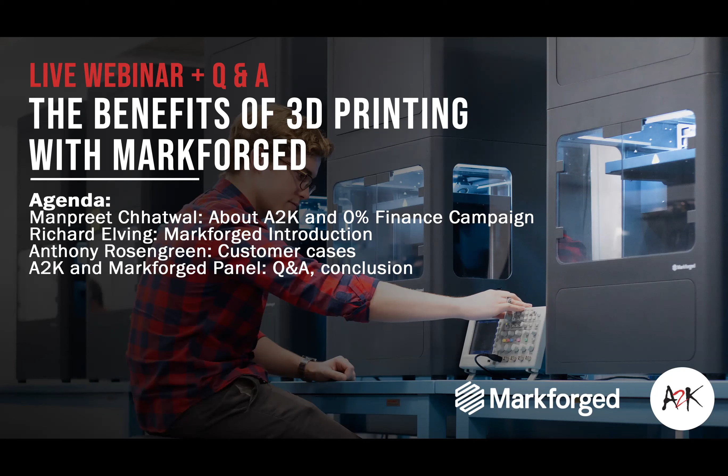So to start with, a little bit about A2K Technologies. A2K has been a technology partner for digitization of the AEC and MFG industry for about 30 years now. We help our clients reach their full potential by delivering complete technology solutions and support services such as education, consulting, project management. As part of RIB Software, a German stock-listed construction management ERP provider, now 70% owned by Schneider Electric, we have a global presence, but our focus and excellent footprint in the ANZ market is testament to our Aussie origins. We partner with numerous industry leaders, providing all sorts of technologies to our clients, and among them, standing tall is Markforged.

Okay, thanks for that introduction. My name is Anthony Rosengreen, and I'm the Markforged Applications Engineer for Australia, New Zealand, and India. I work for Markforged based in Melbourne with my local APAC Applications Engineering team. As part of my job, I have the chance to visit some of the most innovative customers in Asia Pacific, to get to know them and understand their journey towards Industry 4.0. So what I'm going to be doing today is introducing you to the company of Markforged, the industries we play in, our products, and share a few customer stories specific to each of our machine categories.

So first, a little bit about Markforged. We were established in 2013 in Boston, which is quite old for the additive manufacturing industry, and were founded by a team that came from MIT, a team of engineers. We're industry leaders in enterprise adoption and enablement, primarily enablement of manufacturers. In 2018 and 2019, we were earmarked as the second fastest growing hardware company by Deloitte, and in 2018, Forbes spruiked us as the next billion-dollar startup.

We have a few strategic investors, including Microsoft, Siemens, Porsche, and Summit Partners, among others. We've raised 140 million after an 82 million Series D round in 2019. So I am personally proud to be working for a company that has the world's largest fleet of online industrial 3D printers.

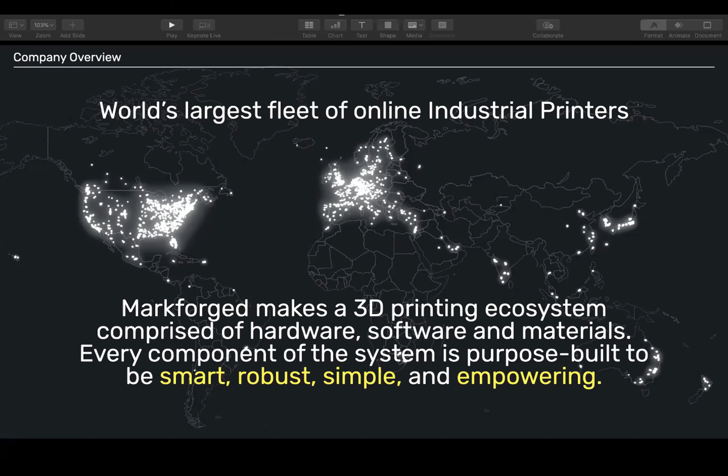So why 3D printing and why high-strength additive manufacturing? Well, firstly, to enable your business to move into Industry 4.0 and secure a competitive edge. As we all know, supply chain resiliency is an issue right now, and this technology helps enable manufacturers in this environment. The second point is to increase revenue and profits. With additive manufacturing comes a lot of simplicity in terms of labor costs, so you're able to minimize downtime, lower costs, and reduce inventory or overhead. We often talk about a digital inventory rather than a physical inventory, which is one way costs can be saved.

And finally, more productive and efficient manufacturing. High strength 3D printing enables faster line changeover by printing jigs and fixtures, for example, as well as other applications, rather than making them in the traditional labor-intensive way, resulting in greater yields and reduced lead times.

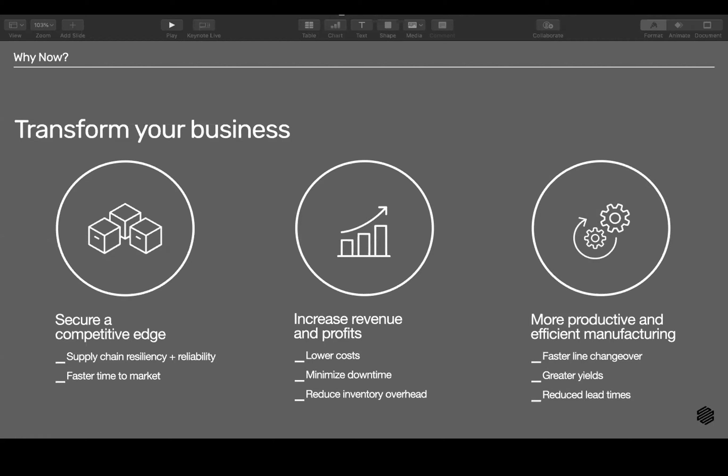People often ask me what are the best applications for 3D printing for high strength composites, and I guess it's a matter of how long is a piece of string.

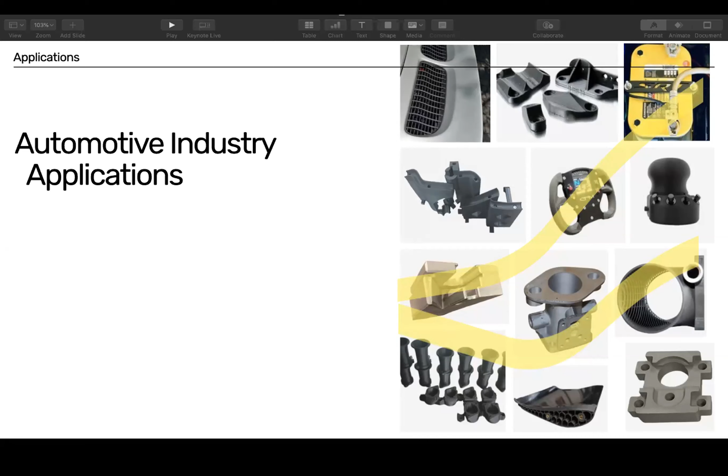One of the biggest industries we find applications in is automotive. Within this industry, we start with simple things like steel fixtures for bending and brazing, high strength composite work holding fixtures for alignment, machining and welding, aftermarket parts for vehicle repair and restoration, high performance carbon fiber racing parts for racing teams, and custom steering wheels and control grips.

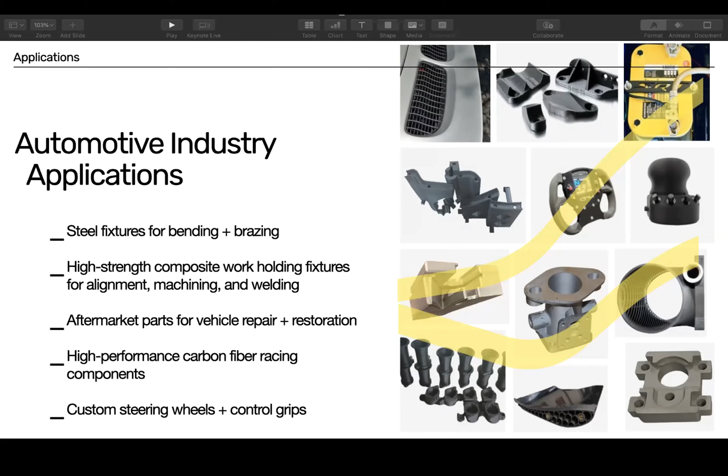Moving on to another industry, aerospace. What I find in Australia is that drones are a very popular application of Markforged 3D printers, and this comes from the design freedom and lightweight, strong components you can make with Markforged composites.

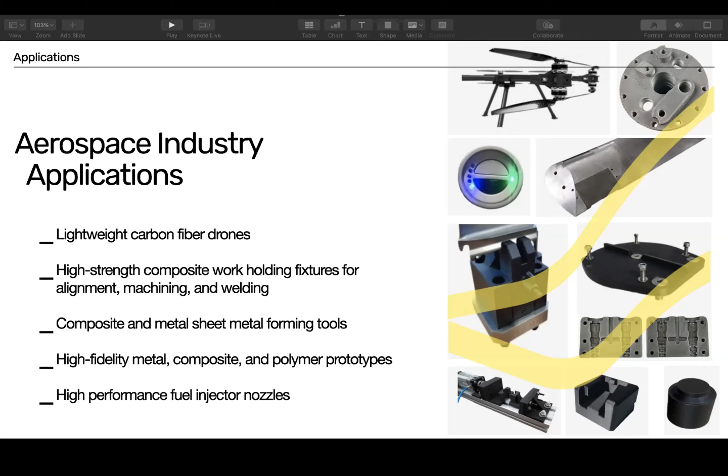So what we see is a lot of lightweight carbon fiber drones, high strength composite work holding fixtures, composite and metal sheet metal forming tools, and high fidelity metal, composite and polymer prototypes, as well as fuel injector nozzles, that sort of thing.

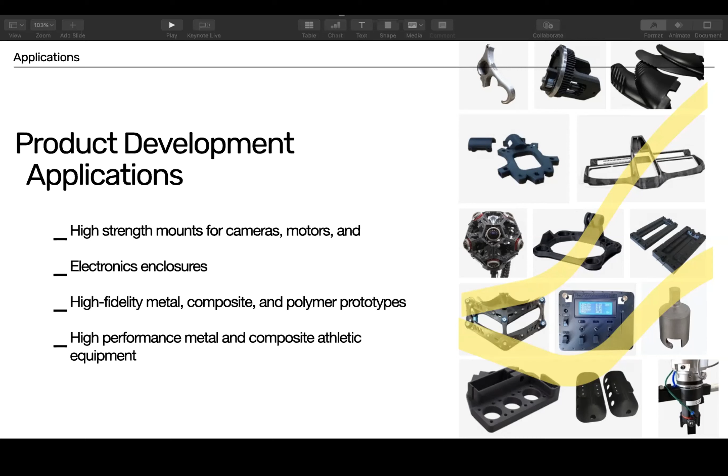Finally, product development applications. While Markforged is quite useful in terms of printing jigs and fixtures, enabling the manufacturing process, it's also very useful in end-use parts, which comes into its own in product development. So what we've seen includes electronics enclosures, high-strength mounts for cameras and motors, high-fidelity metal, composite and polymer prototypes, and high-performance metal and composite athletic equipment.

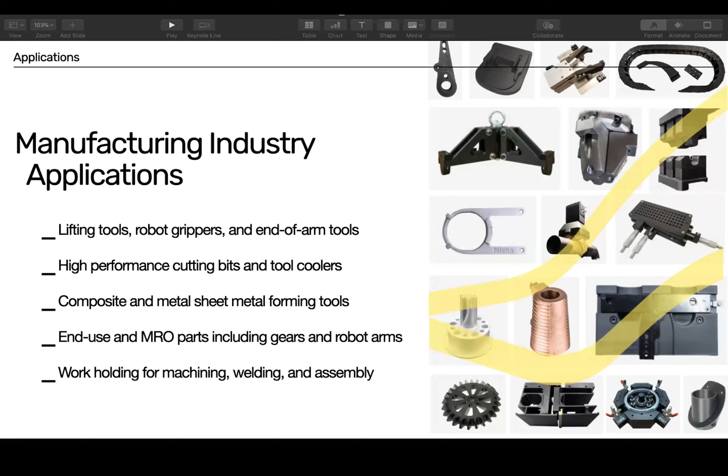Let's also have a look at the manufacturing industry. This is basically Markforged's bread and butter, especially in the US. In terms of manufacturing applications, we have a lot of case studies involving lifting tools, robot grippers, end of arm tools, cutting bits and tool coolers, composite and metal sheet forming tools, end use parts, and work holding for machining, welding, and assembly.

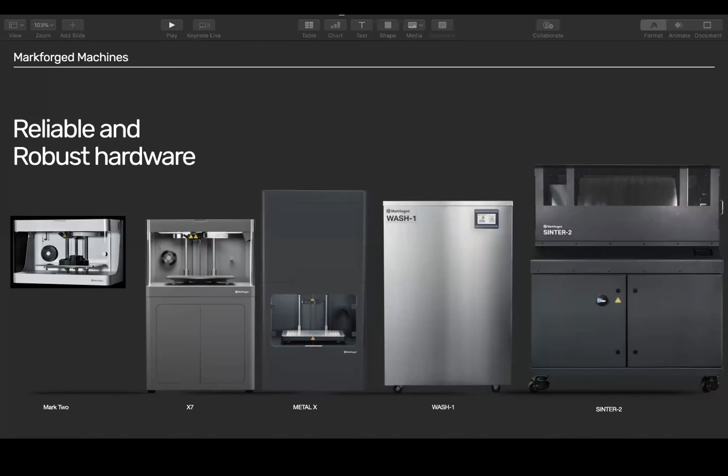So how do we enable such a wide variety of applications? The answer is through a combination of our materials, our software, and our hardware. What you can see here is the range, on a basic level, of our hardware, which I'll go through in a little bit more detail later.

We start on the left with the Mark II, which is more of a desktop machine. On the right you can see our metal system, and between there is the X7, which is our industrial workhorse.

What we focus on is industrial 3D printers. We're not interested in printing plastic things that break, we're not interested in Yoda heads. We're interested in printing things that have high dimensional accuracy, dimensional stability, and parts that are extremely strong and light.

We pay a lot of attention to software and making sure our parts are within spec. As part of that, we've integrated a lot of exciting AI components with our laser, which is inside our X7 machine, that ensure the part is to spec, exactly how you've designed it, to within around 50 microns and sometimes less.

If we move on to materials, basically we focus on composite materials and metals. Our base material, which is a matrix, is what we call Onyx, a mix of nylon and chopped carbon fiber. We have a variation of Onyx, which is Onyx fire retardant. We also have nylon white, which is nylon without the chopped carbon fiber.

You can then add continuous fibers in terms of Kevlar, high strength, high temperature fiberglass, and carbon fiber as a continuous fiber. Coming soon will be electrostatic discharge material, which is basically Onyx but with high electrical conductivity. If we move on to metals, we have a variety including 17-4 stainless steel, Inconel, H13 tool steel, D2 tool steel, A2 tool steel, and copper.

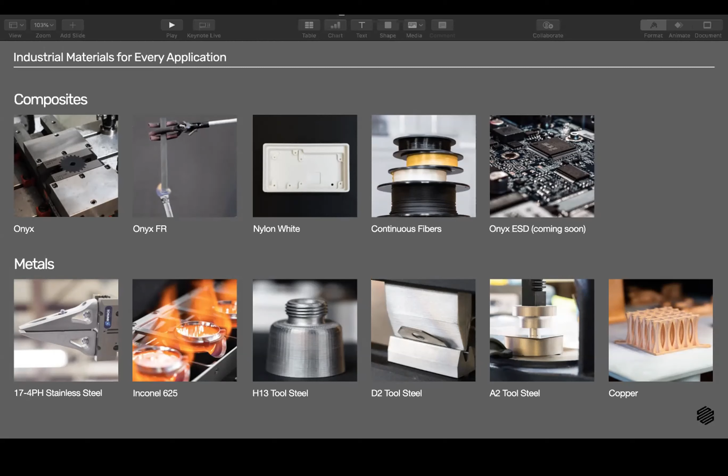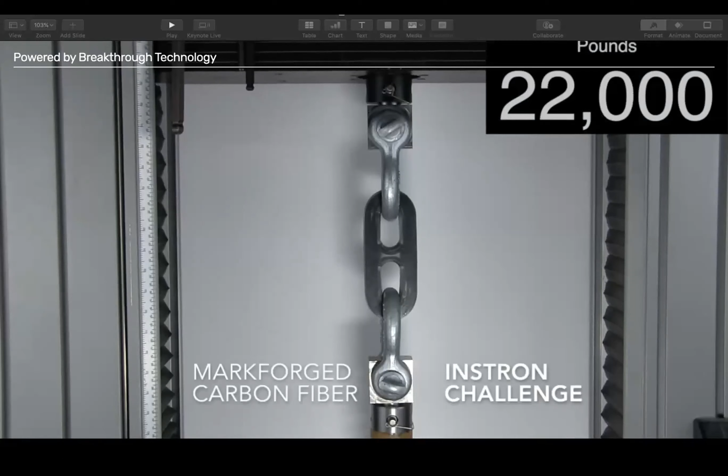So this is an example of a test that some of our graduate engineers did, where they designed a chain link that can hold 21,000... and we'll wait for it... 22,000 pounds. That's equivalent to lifting a cement truck. So that's the sort of strength you're getting with Markforged composite 3D printers.

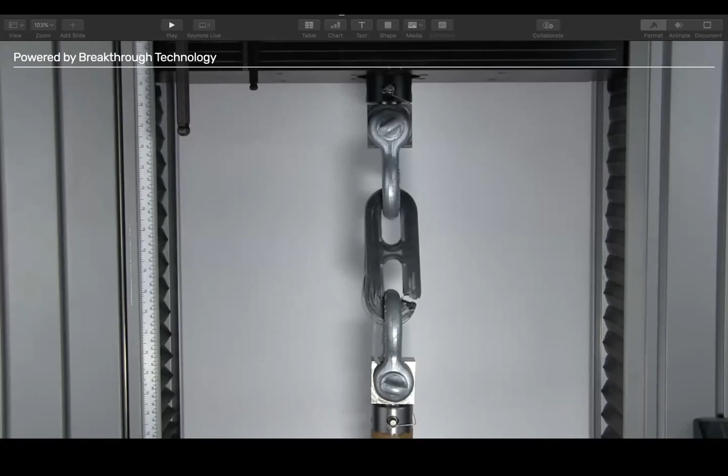Okay, moving on to our metal system. Basically, the philosophy with our metal system is to be able to print pure metal parts that's safe, affordable, and easy. Many of you familiar with 3D printing will know there are a lot of systems out there, but there can be issues around safety and usability of these machines.

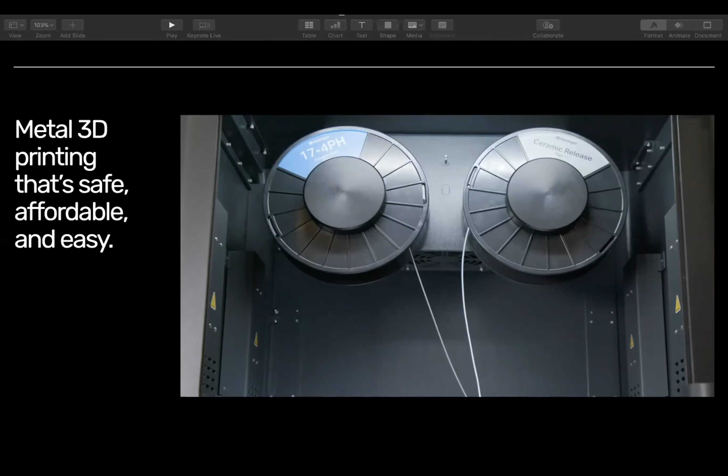So how does this actually work? How do we make it safe? How do we make it user-friendly and reliable?

Step one, on the left-hand side there, is that we have basically a metal powder which is bound by a wax and polymer system, and that's raveled into a spool. That is then printed using a layer-by-layer system, or FFF style.

The next stage is the wash. With the washing stage, what this does is it takes the wax out of the part in a solvent or debinder system. Once that wax has been removed, or most of it, it's then sintered in a high temperature furnace, which is inert and doesn't let any contaminants in.

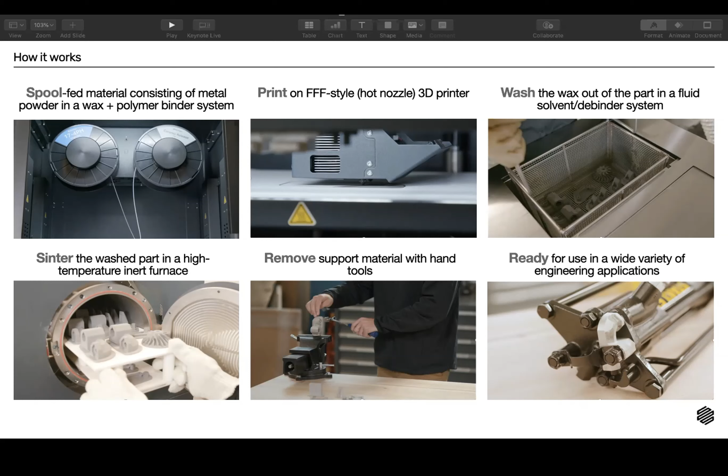Once it's been sintered, you remove the part. We have a system for removing supports using a ceramic release structure, so you can simply drop the part on the ground. The support material is removed, and then you can either post-process or apply the part as an end-use part, however you wish, however your workflow is set up.

So in terms of the Metal X, this is our metal printer, and this is the first part of the process. How it's designed is similar to how Tesla operates, in that they future-proof the hardware. For example, we have a laser in here which, when it was released, wasn't used to its full capacity.

But now we're increasing the software component to include AI, which is able to scan these parts as you're printing. It's able to compare different prints, past prints to future prints, and adjust, making the printer much more accurate as time goes by. So there are a few of these software features we're constantly pushing into these machines, which make them more reliable, more accurate, and more user-friendly.

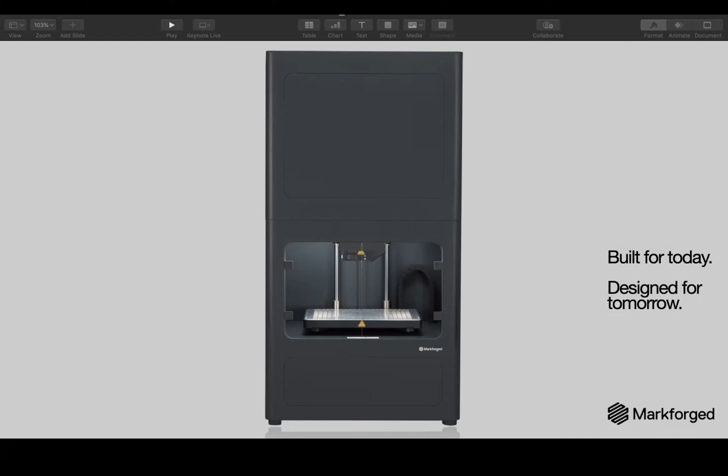And this is what we call the digital forge. This is how we package our machines in terms of our branding.

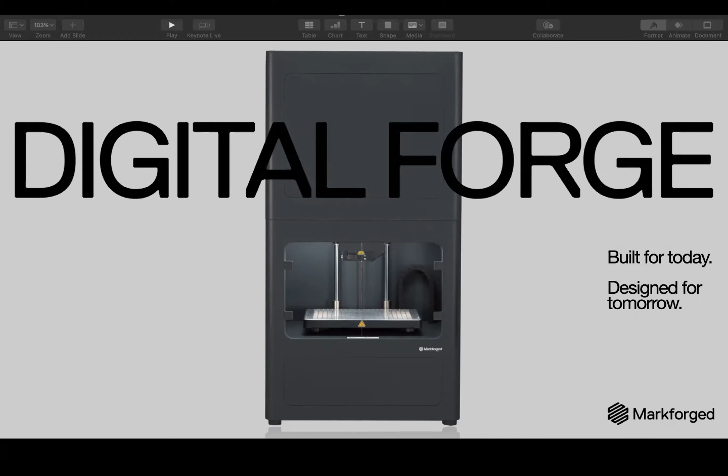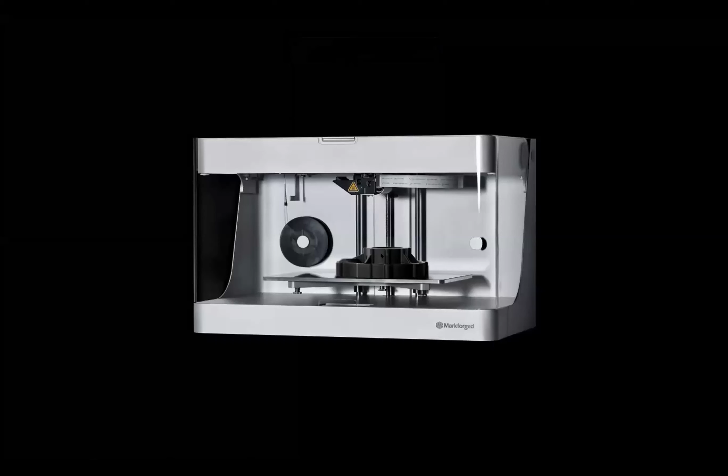Okay, so what I'm going to do now is share with you some customer stories. The way I'll do this is to look at each of our product categories, and then explore a customer who owns one of these products. Maybe they own a fleet of these products, and I'll share the story of how they've moved to Industry 4.0 from traditional methods.

So I'm going to start with the smallest of our machines, and despite its size, it packs a punch in terms of availability of materials such as Kevlar, high strength high temperature fiberglass, normal fiberglass, and carbon fiber continuous filament. The black stuff you see in that part is the matrix, which we call Onyx, a mixture of nylon with chopped carbon fiber, and inside of that we can inlay continuous filament. If you're interested, you can go to our website to see exactly how this works.

So in terms of our first customer, we're going to start here in Victoria, where I am right now. This company is called Additive and Robotic Manufacturing, or AaRM. They started out being called Added Value Aluminium, and they distributed aluminium components to customers in Victoria. Ross Torr started Added Value Aluminium as a way of setting himself apart from the stock standard aluminium distributors of the industry. In the beginning, it was simply supplying customers with extrusions cut to length, drilling holes and punching holes.

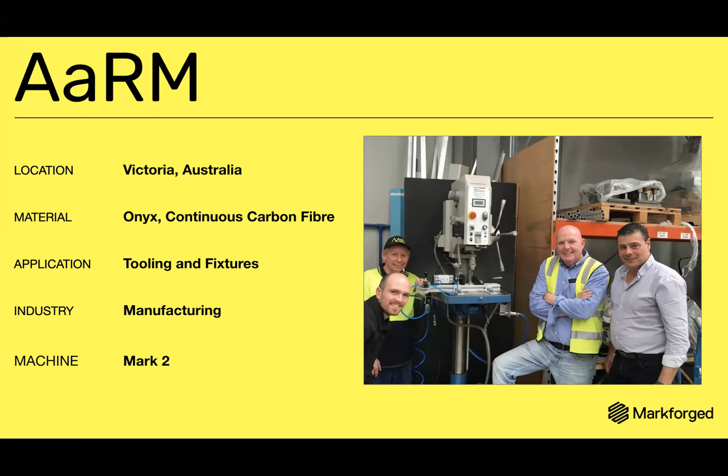This has allowed the business to make complete working production units, such as their pneumatic portable clamping system. I'm going to discuss this part in a bit of detail here. This is a part designed by AaRM, a custom pneumatic portable clamping system that was completely 3D printed, except for the aluminium extrusion base and the pneumatic air cylinder.

It was easy to set up on the drill press, the milling machines, the automatic tapping machines, and copy routers as needed. They can print the basic pneumatic clamping system parts at any time with no need to set up tooling on the production floor. All they need to do is cut a bit of extrusion, buy an air cylinder, print the parts, and we have another effective clamping system unit ready to go.

Another big plus is that if there is a machine or operator mishap, the damage isn't too costly. All you have to do is print a new fixture overnight. There is no need for costly repairs or loss of production, and there's no need for machine downtime.

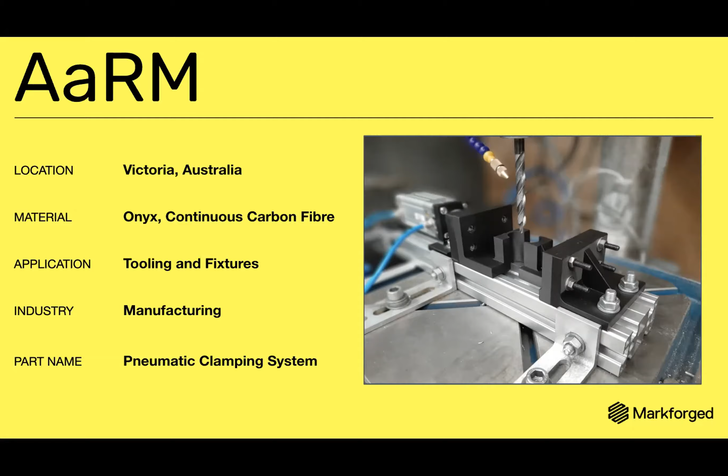Moving on to the X7. This is a truly industrial machine that delivers all of Markforged's matrix and continuous fibre materials in a much bigger build volume than the Mark 2 and faster print speed as well. This also features a raft of different software features which aren't available in what we call the desktop series.

So who's using the X7? Here's an example: SureGrip Hand Controls, a leading manufacturer of aids for disabled drivers. They're a veteran of additive manufacturing and have worked with 3D printers since 2012. As they began expanding into international markets, they realized that in order to compete, they needed a next generation solution which would give them part quality and part durability to rival molded components. SureGrip Hand Controls is a leader in the disabled driving aids market in Canada and the US.

The president and founder, Keith Howell, became a quadriplegic in his early teens, but still carried a strong desire to drive a car and to be independent. After trying many different types of hand controls, only to find that the manufacturer of his preferred style was no longer in business, Howell founded SureGrip in 1986 to bring the push rod style of hand control to the market. Since then, the company has become a highly innovative manufacturer with a mission to bring independence and mobility to users around the world.

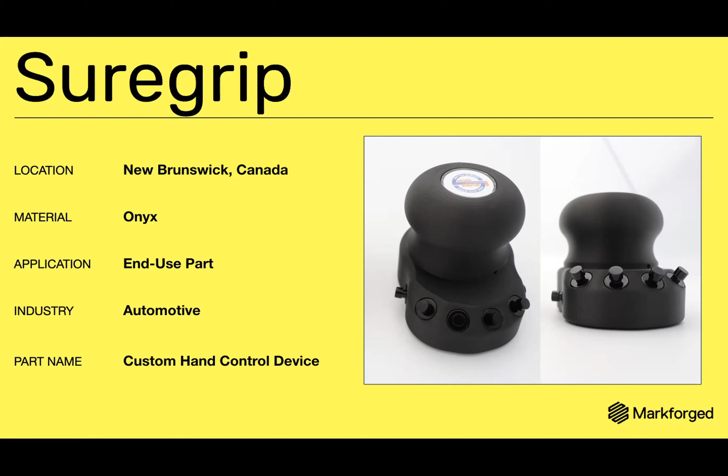So finally, we move to the Metal X, a safe and reliable additive manufacturing solution which uses a print, wash, and sinter workflow. With this unit, you can print a wide range of metal materials, including copper, stainless steel, tool steel, and Inconel. And what you end up with are pure metals ready for machining.

So who's using the Metal X? Well, one company which is using the Metal X is Sandia National Labs.

Sandia National Labs is a science lab funded through the Department of Energy in the US. Among a wide range of other projects, they're chartered with contributing to a body of research to improve the efficiency of internal combustion engines. To support this mission, the team produces physical simulations of different diesel fuel flow scenarios.

As the team at Sandia pushes the boundaries of design, they run up against physical manufacturing constraints. In order to produce the unique internal geometries that result in optimal flow, they used to rely on third parties for a combination of laser sintering and CNC machining.

As you can imagine, when you're designing this sort of geometry, it can be extremely complex, and getting those internal channels is basically impossible with traditional CNC machining techniques. So while the resulting parts they ended up with from outsourcing these geometries were functional, they took weeks or months to get the final part, and the part may cost tens of thousands of dollars.

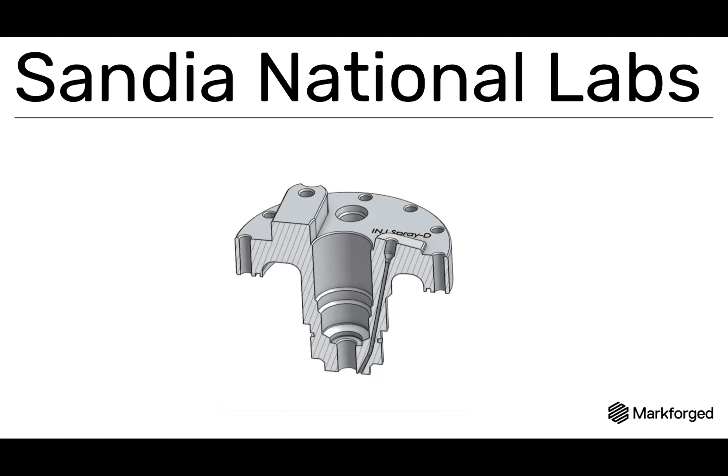The internal geometry is highly intricate, requiring non-traditional techniques to achieve internal flow lines. The Metal X is able to print this structure inclusive of the internal complex geometry, which previously required highly specialized and significantly more expensive equipment. After printing, critical surfaces and mating features were then fine-tuned using a CNC mill.

There are immediate performance impacts that Sandia looks to quantify in testing, including the lightweight lattice facilitated through the printing process, along with the layer lines on an unprocessed surface. These layer lines actually facilitate a more efficient turbulent boundary layer, for those engineers listening to this.

This workflow has since led scientists and engineers at Sandia to investigate the feasibility of printing additional high-impact components that utilize some of the other specialty materials available on the Metal X. These include high-temperature valves and nozzles in Inconel, among other critical fixturing components for imaging.

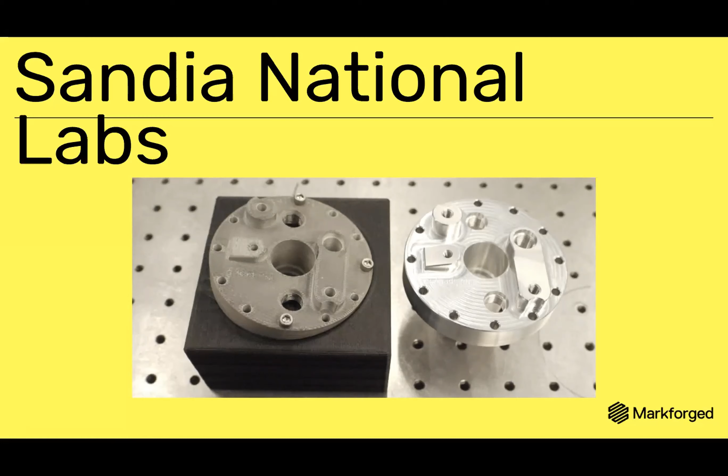A nice thing about this process is that Markforged have allowed Sandia's engineers to be more innovative by encouraging them to fail fast and iterate fast. These are just a handful of the stories on our new microsite, 100 Ways to Reinvent Manufacturing. Each of these stories shows a unique insight into how high-strength additive manufacturing can add a huge amount of value to all sorts of businesses and customers.